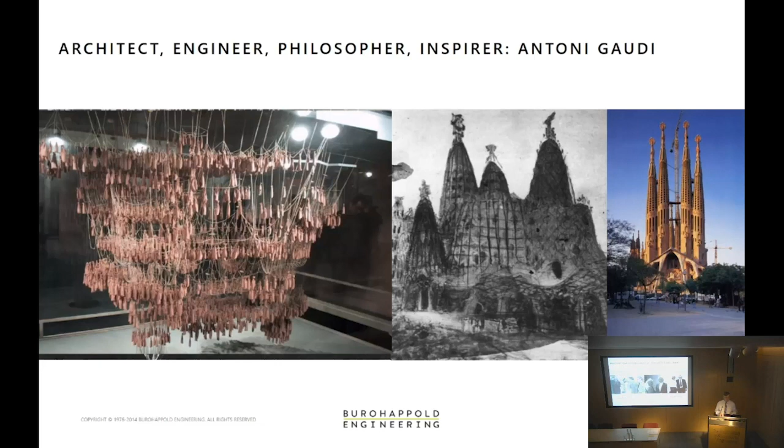I decided I didn't want that one there, but it stayed there. And so, Gaudi saw nature as a driver. He wanted to repeat the kind of forms that he saw out in the field, that he saw in nature, and he found ways through modelling of doing that kind of thing.

Buckminster Fuller, in a similar way—and I'm sure many of you know much more than I do—with his technical approach to architecture came a whole philosophy of how you should live your life and how we should marshal the materials of the world. A lot more than just an architect: an engineer, philosopher, inspirer, as I was calling it.

I think the same very much applies to Frei. I love the fact that we engineers tended to think Frei was an architect who needed engineers to help him, while architects tended to think he was an engineer, and that they were the architects working with this technical advisor. He bridged that gap—is it technology, is it architecture? And of course, it's both.

It's creating a form, an inspired building out of forces, flow, minimum material, and so on—a sort of engineering-driven architecture. The philosophy many of you may know came out of a reaction against the heavy, anti-human architecture and attitude he'd seen through the war, which he grew up in, wanting to discover something fresh and new, inspired by nature, just like Gaudi and Buckminster Fuller, but on a different scale.

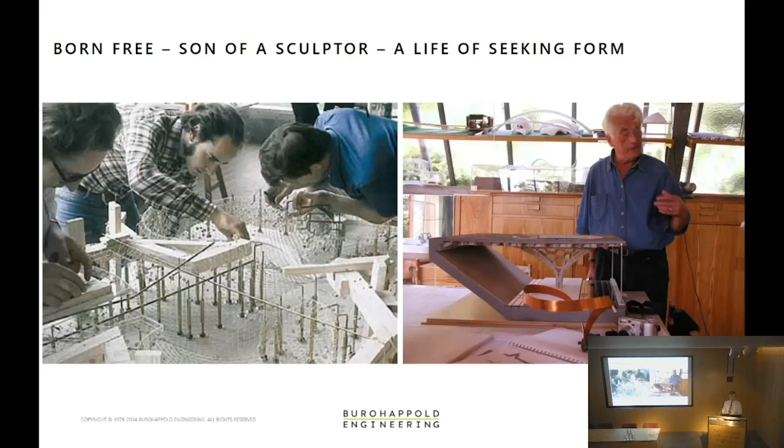He was the son of a sculptor, so there was that sense of form and shape and asking the question why. His first name, Frei, was I think rather clever—he had that sort of freedom and brought it to everything he did, his fresh approach.

This idea of looking at nature, at forms of nature—how do they use their materials, marshal their materials efficiently? How do they turn that into forms with the least material? And how do we translate those forms into buildings? How have we been doing these things over hundreds of years in the past, using local, available materials, and what forms come out of that? That approach, looking at nature, gave him an approach to architecture and engineering.

He was out there seeking inspiration shortly after the war. I had a little look back at the history of how things developed—it was really a philosophy about how to live as well as how to build, which he also expressed by building his own home.

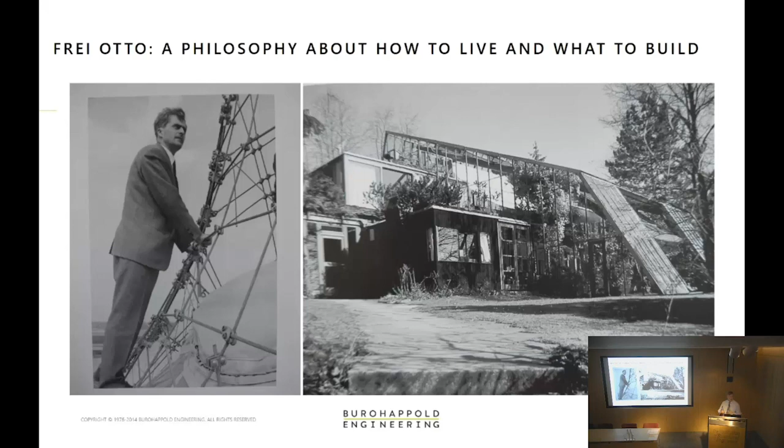In that home he created the spaces that now a lot of people seek—this kind of, is it outdoor, is it indoor space, at one with nature, at one with the cold in winter and the warm in summer, but still at the same time a natural buffer between the extremes of outdoors and indoors. So he lived what he spoke and taught.

In those very early days, in the 50s, he was learning from the masters around him about the use of tension and how that could be modeled—very simple models here of soap films, fascinated in a kind of Germanic way, I think, about how you link everything together, how you categorize. I think they must be fantastic museum curators, because they want to map the flow of everything, the flow of nature, and different forms and how they relate to each other.

So there was quite a streak in him—not quite academic, but a streak. It wasn't a random kind of creation; he very much wanted to understand a process, understanding what was at the core of his thinking. That helped a great deal when—I don't know the full history of this—he was funded by the government and was able to set up his Institute for Lightweight Structures back in '64.

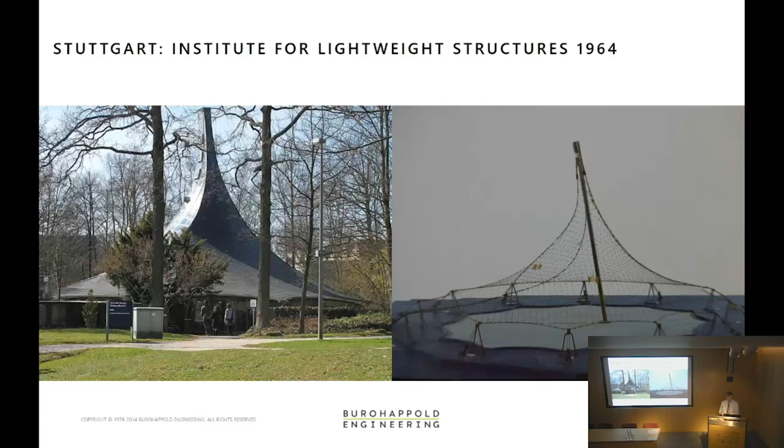It was actually my visit to that institute back in the mid-70s where I first met him—a very inspiring place, in the woods, which looks like something you've never seen before, and then you're told that it's a sample piece, a piece of the roof of the Montreal Expo pavilion.

Then I learnt that he was such a generous man. I was a student, being a bit of a nuisance, saying, can you please introduce me to people I should meet around Europe and around Germany, etc.

It was quite complicated. It needed a lot of thought. It wasn't something you could just get Mr. Model Maker, Mrs. Model Maker to go off and do and bring back in a week's time. It was crafted by experts, engineers, people who were inventing methods - is it better if we put the spring in this way or that way? How stiff does the spring need to be? Finding, through these forms, modeling methods which would equilibrate forces.

So they couldn't be done - they certainly couldn't be the sort of things we see too many of now, the 3D photocopying sand models, which don't tell you anything about materials. They don't have the force flow in them that's anything to do with reality. They just sit there like dumb objects.

This was very much active engineering meets architecture modeling. And out of this really hard graft and focus come the most amazing forms, but all driven by the flow of forces - how do I get a flow of tension from the masthead out to points in the ground. And then you discover the most beautiful forms that they make.

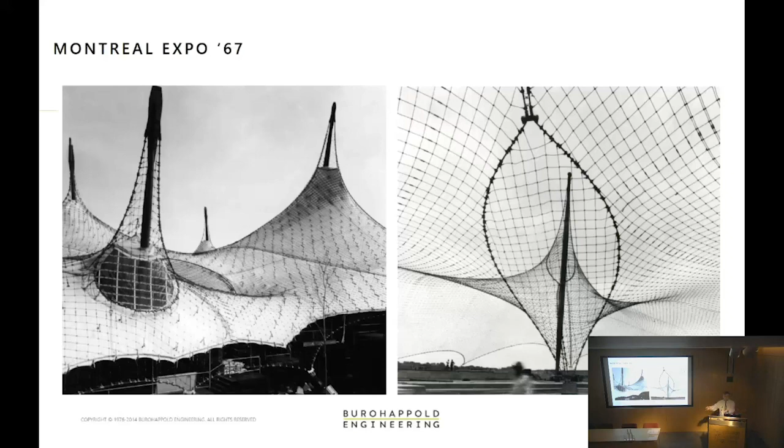So Montreal Expo was really one of the major starting points where people really started to notice Frei's thinking, but always collaborating with architects. He came as this engineer-architect who helped inspire and encourage architects - feet-on-the-ground architects who knew where to put the front door, whether it needed catering here or there, who could make a whole thing out of it. Working with Frei, their architecture suddenly took off.

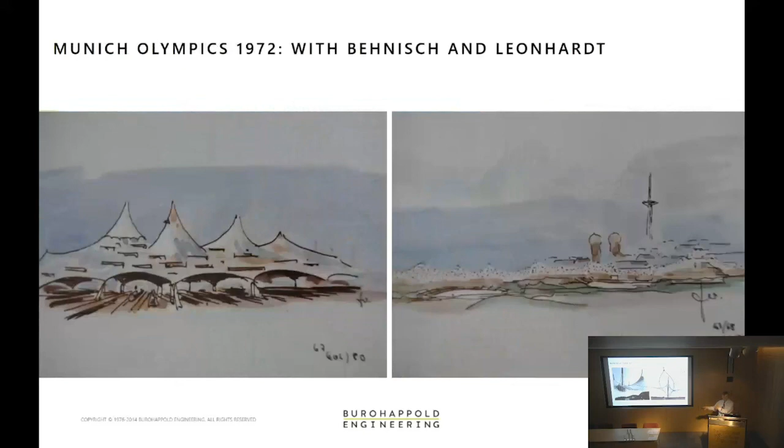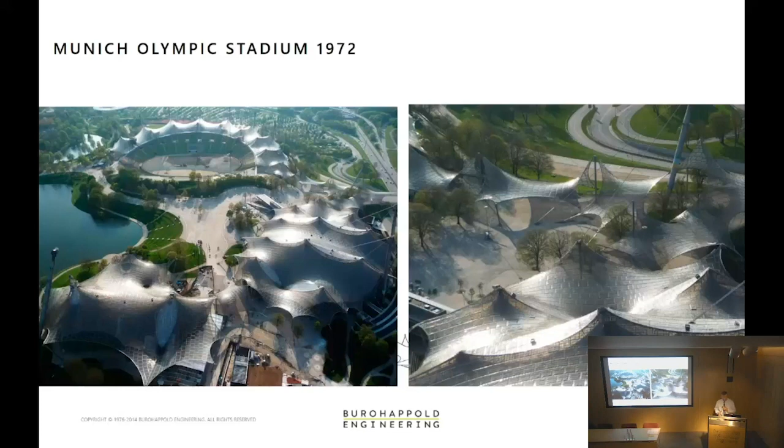Munich Olympics followed, with even more modelling, even more complicated and precise, particularly difficult when the local authorities required it to conform with big building regulations, not to deflect more than a few millimeters on a building that clearly wants to deflect a lot more. It's interesting whether they couldn't have defined this as a suspension bridge instead, and said don't think of it as a building. But the most beautiful, outstanding stuff came out really quite early in Frei's career, which I always think is quite remarkable.

From a personal point of view, I have to bring in the Ted Happold factor. He's an ex-president - I think he was a gold medalist over there too. So his spirit is here, etched in the woodwork as well.

And it was really meeting Ted that meant I got to meet Frei - he'd made friends with Frei, I don't know, 6 or 7 years before I met Ted, and had started doing some really interesting things.

Apparently the story is that he met Ted at an airport at Mecca - no, probably not, possibly at Riyadh airport. But anyway, they were both doing the same competition, for different sites if that makes sense. Frei was looking for an engineer, and Ted, working at Arup, was already an engineer on one of these buildings, a conference center. Frei was looking for an engineer for another one, this in Mecca.

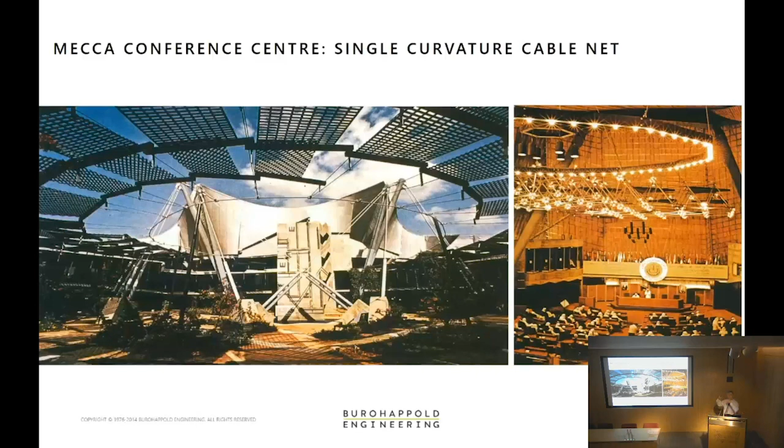Completely different kettle of fish - single span cable net, single curvature cable net, needed a lot of heavy concrete to weigh it down, and he was struggling to find an engineer who didn't just run away saying, well, we've never done anything like that, not interested, it can't comply with the DIN codes, thank you very much. But Ted had a habit of chuckling and saying, yeah sure, we'll do that. He had the whole strength of Arup behind him, and a fantastic team with Ian Liddell and Michael Dixon, so we'll crack that one.

And they did, they built it. Never got to see it, but of course, being in Mecca, they were not of the right persuasion, so they missed out. And out of that relationship, built in the very early 70s, other work started to flow.

This is where I first came in. They were working at Arup as a team, Structures 3, and had been asked by Frei to do another project, the Mannheim lattice shell, where I believe they already had engineers. They were working with local architects, and they kind of gave up. This was too thin. This crazy architect engineer who keeps saying no, it will work, and they had no way of finding out whether it would or not. So they went to Ted, can you help?

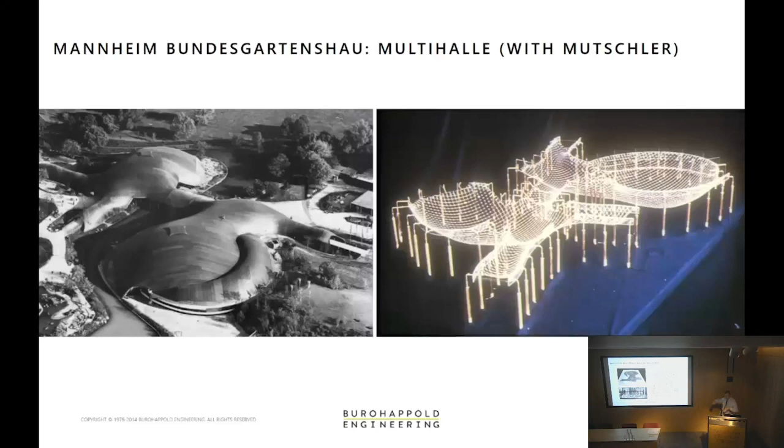And Ted, not knowing whether he could or not really, said yeah, sure, and set the team at Arup working away on it. It was a lot, as always, of modelling, but of course you're not seeing the tension structure modelling that we've seen for those tension structures. This is a shell, a compression structure, so it's much in the Gaudi spirit of things.

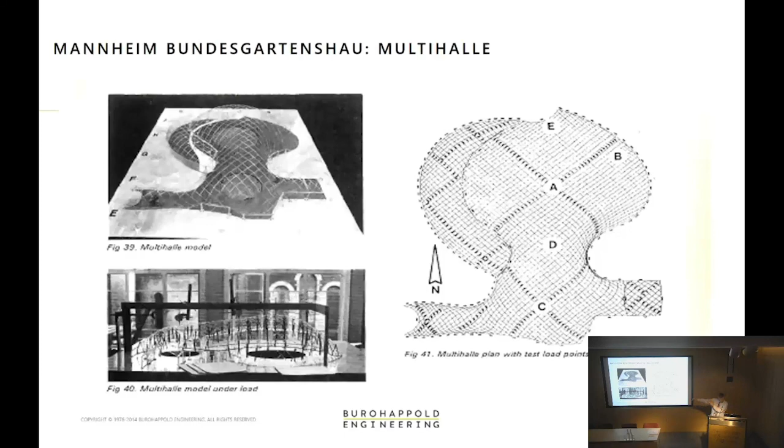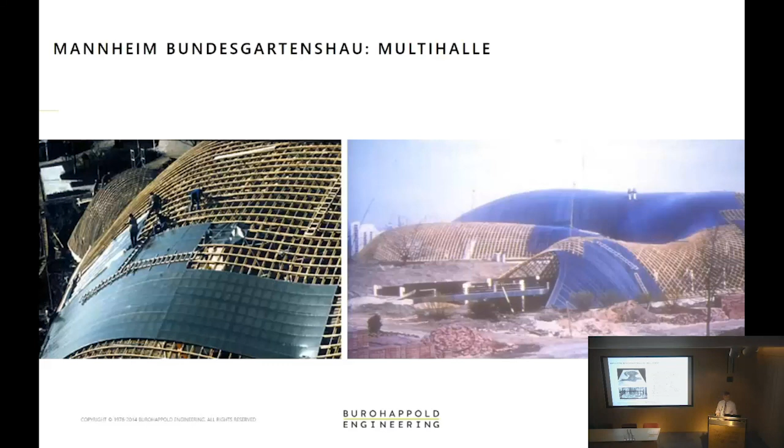And then hanging nails on it. Those near the front might just about perceive the nails, and testing it for buckling. No computer modeling really up to the job at that stage, so physical modeling to test whether this very thin timber lattice shell of a shape and a scale that nobody had ever done before would buckle or not.

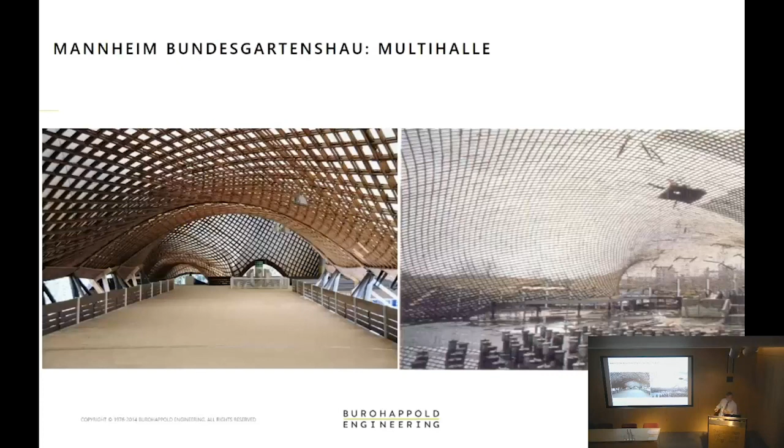And yeah, I managed to prove it would buckle, and out of which they decided, not surprisingly, I'm sure any engineer here wouldn't be surprised, but it's quite hard to see, that we did indeed have to include, as well as the two-way lattice, diagonal cables, almost invisible, because we couldn't tighten those nuts hard enough with our spring washers to stop the rotation of the nodes, to triangulate the lattice into a shell.

But that relationship now built up between Happold and Frei is really what I can talk about and show you just a few slides of what that meant for me.

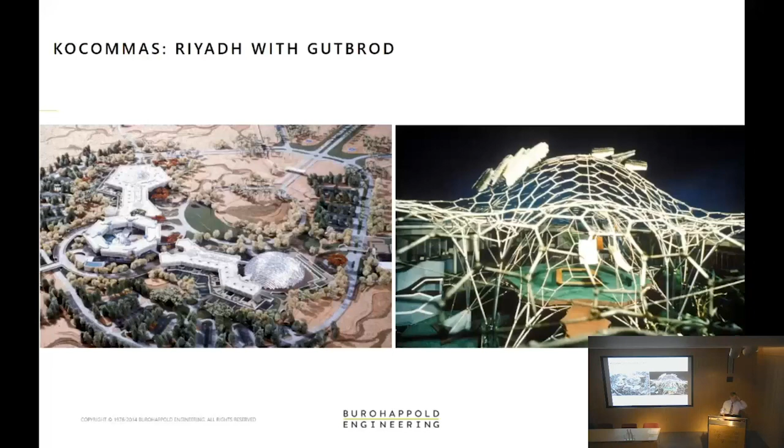Ted went off, while at Arup they were working on this much bigger project which Rolf Gutbrod, the architect, had won for a gigantic parliamentary building, King's offices in Riyadh. Didn't get built, probably no surprise for the political students in the room, and upside-down hanging models creating those most amazing forms of potential shell structures.

And my job was there again, Perspex models, hanging nails, listening to the radio and having a great time, back in the summer of '76, as it happens.

So that relationship, I think, was really important. I think at that point, that relationship between Ted Happold and Frei was probably the strongest engineering support which he really needed to carry through some of his dreams.

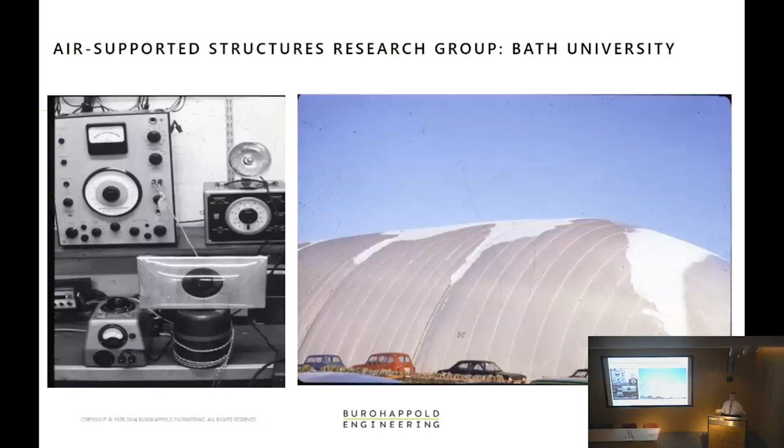And I thought what was interesting is, I hadn't realized at the time, but Ted immediately wanted to do what Frei had done, set up an institute for lightweight structures up at Bath University. And I didn't realize that that's what he'd drawn me into, so he said, come and join me up there.

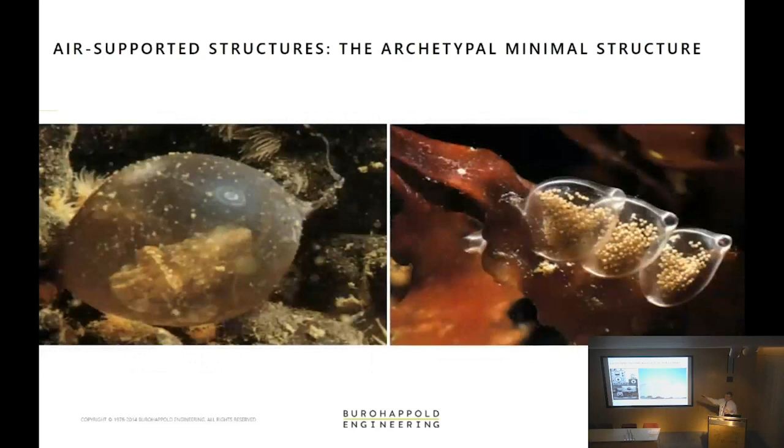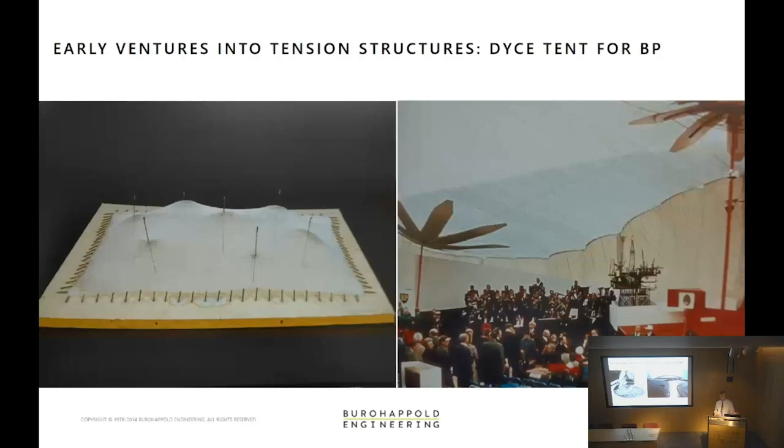And we played around with air-supported structures, research on air-supported structures. That ought to be a good way of getting to the fundamentals of what makes a tension structure tick. And of course, air-supported structures do have a very exciting potential. They have a very exciting origin.

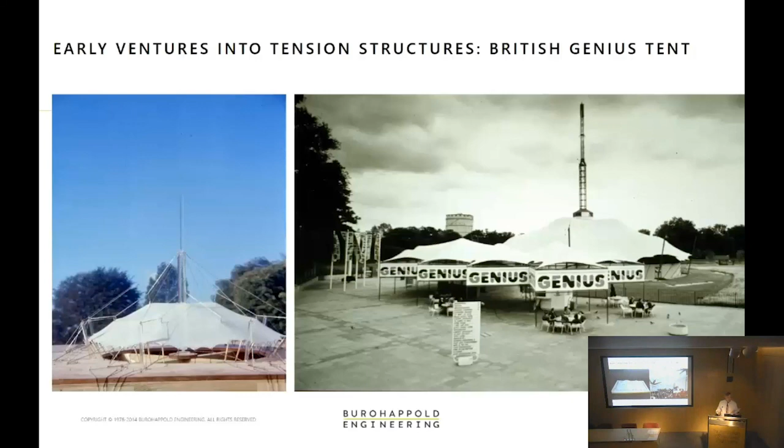And they can make some pretty little buildings. They can make some pretty little tents like Pink Floyd. And in those very, very early days, we were just playing with stocking models and pushing and pulling and making shapes, cutting patterns. Even here in these days, towards the late 70s, generally speaking, cutting patterns coming by measuring the model.

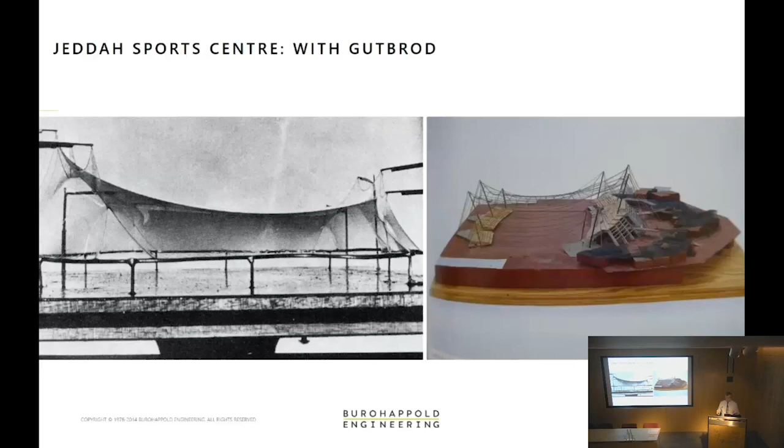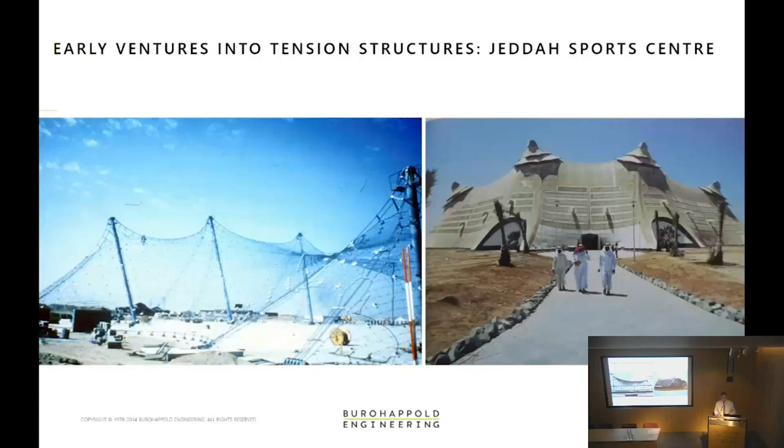And so you see a lot of this stuff starting to evolve. This relationship, I think, helped Frei, with that engineering support, deliver quite quietly. Often I don't think he's recognized for some of these very elegant, very productive buildings. They did their job.

As you can see here, the Jeddah Sports Centre. Nobody had ever seen anything like that. I'm not sure if they wanted to ever again, but it was certainly going to wake people up. It's very, very elegant without its clothes on, of course. It's sometimes a problem when you have to keep the weather out.

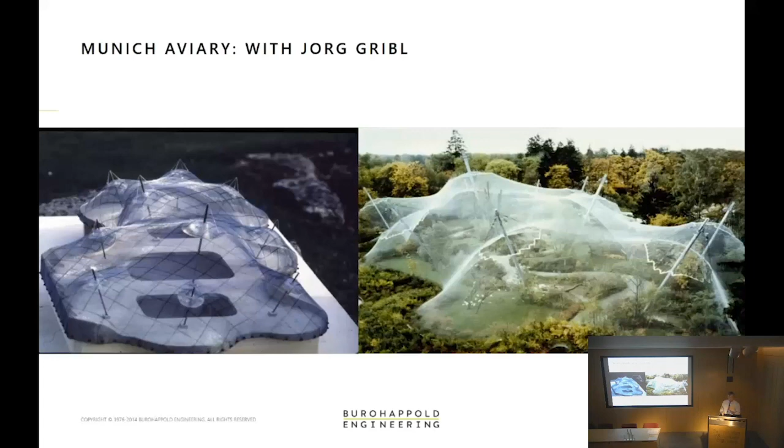And so these relationships, always trying to put up there the kind of core architect who then brings in Frei and says, I want to do something really exciting, help me. Let's use your way of looking at the world to help this be exciting. So the aviary in Munich, which spread into other aviaries. And again, further model studies.

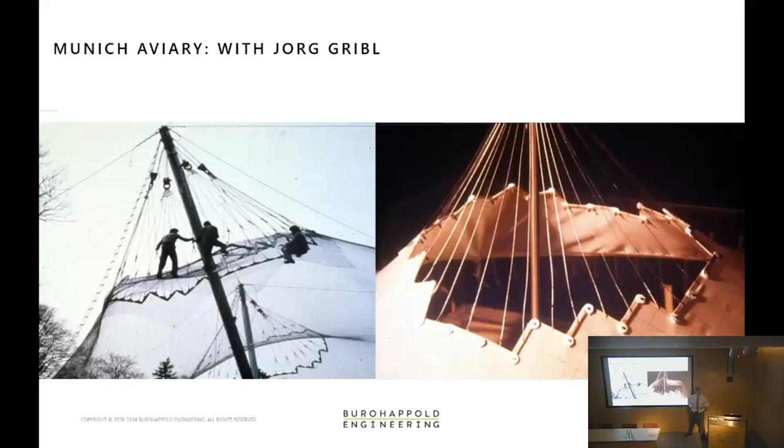So my luck was my coming to those moments with Frei were often around modeling like this. How the heck do you get the forces out of a two-way mesh of woven wire up to a point without the wire going, mangling and distorting all over the place? How do you keep it in balance and translate these forces into the radial forces successfully and let it modulate and move under loads.

And I remember the debate about whether it would need to be designed for snow loads, and there was quite a strong vote for no, because it would all go straight through the mesh. But someone cleverer worked out that if it was a very cold mesh and so on, it would sort of stick and build ice, and then it could build up. And almost, it's usually the first winter—I don't know, many of the engineers in the room will know this—it's almost as soon as you build it, it gets the 1 in 100-year load or something, so it's never worth skimping on it. And so we played around with all sorts of things.

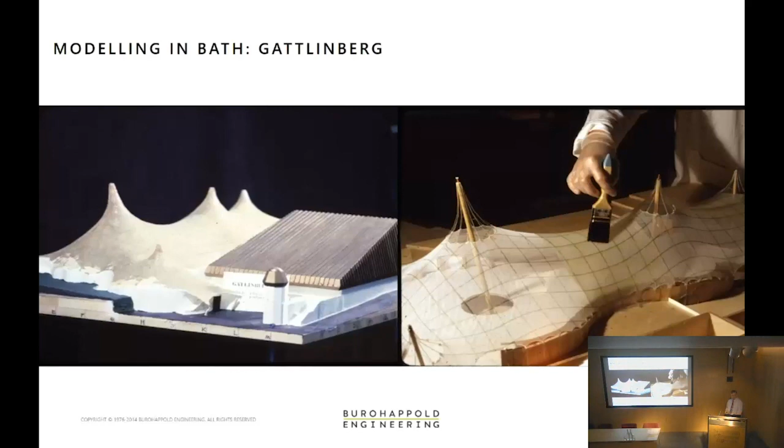And I suppose here the influence going worldwide, this was a project in, I'm going to get this wrong, in the States, but I think it might have been a Canadian architect. But people were coming from all around the world to look to Frei for help, and then Frei coming to Ted Happold to get that help. And even with Canadian architects looking at something he'd looked at with Arup previously, covering a giant community in the Arctic—in this case, not quite the Arctic, but 58 degrees north in Alberta, a pretty harsh climate.

And this idea, I found really interesting, and I think is significant about Frei, when you look at his ability to build in these harsh climates—this idea of the building as a skin, and the skin as a climate moderator, started to give a different sense to architecture. It's almost like not architecture for its own sake, it's architecture for what it can do for the people—the creating of the oasis garden, the creating of these sheltered spaces away from the sun, and yet somehow not imposing themselves heavily on you.

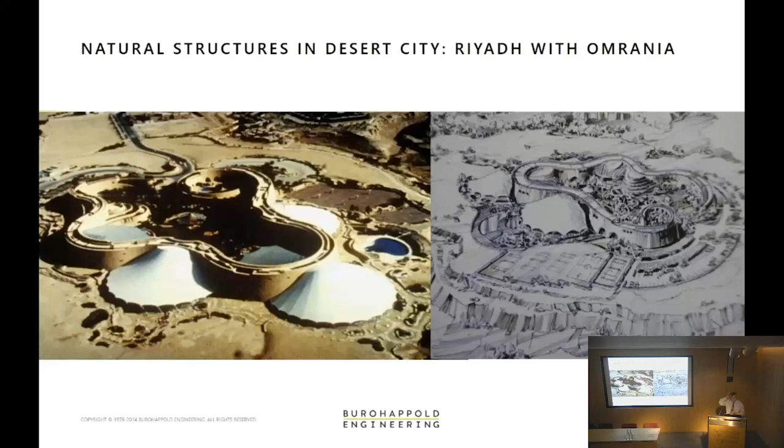Although having said that, of course, perfectly happy to create a quite robust core to all of this. And I think that combination he achieved, obviously with others, with OMRANIA, the architects in this case, is one of his masterpieces, and should be seen alongside something like the Munich Olympic Stadium, and I'm sure David would agree, having worked on it. And very, very beautiful space that he was creating.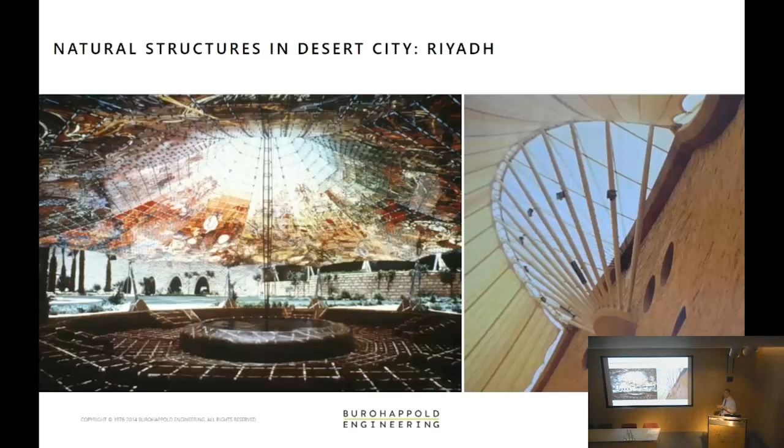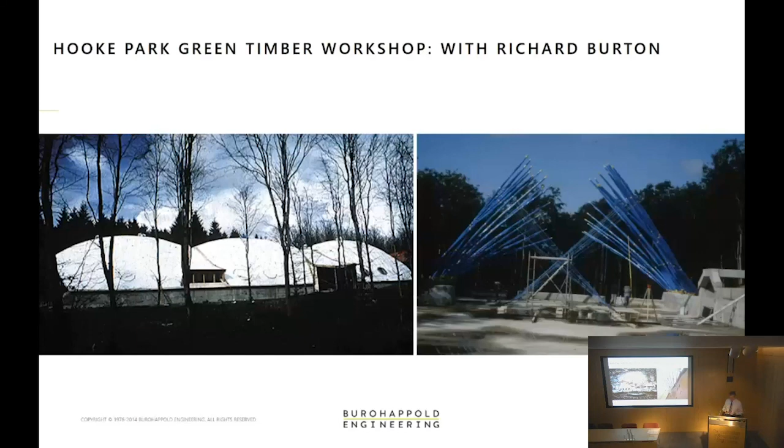I think this sense that he wasn't just about the buildings and the technology of the buildings—I think these start to show that there was always that element he was absolutely driving for: the effect that these shelters, these spaces, would have on people, the inspirational effect on people. And in the Medina Mosque, I don't have a video here, but the opening and closing of these umbrella roofs is quite an emotional thing to see happen.

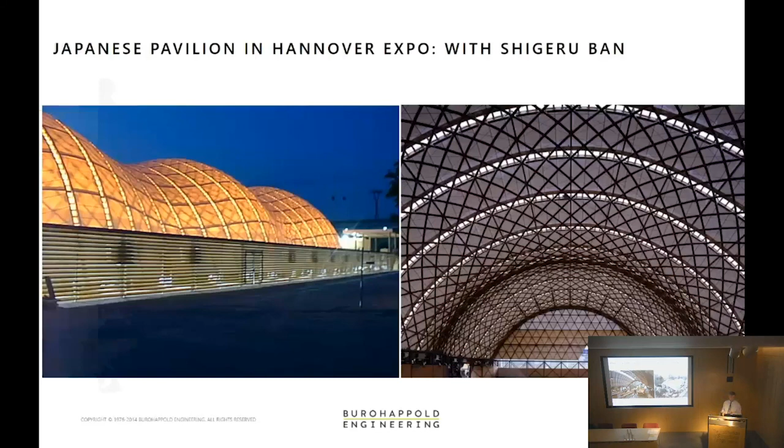And then the use of green timber over in the UK, finally seeing more of Frei in the UK, working with ABK, Richard Burton in particular, with Ted Cullinan at the Weald and Downland Museum. And to some degree, this was us helping make a marriage between Frei Otto and UK architects, Shigeru Ban.

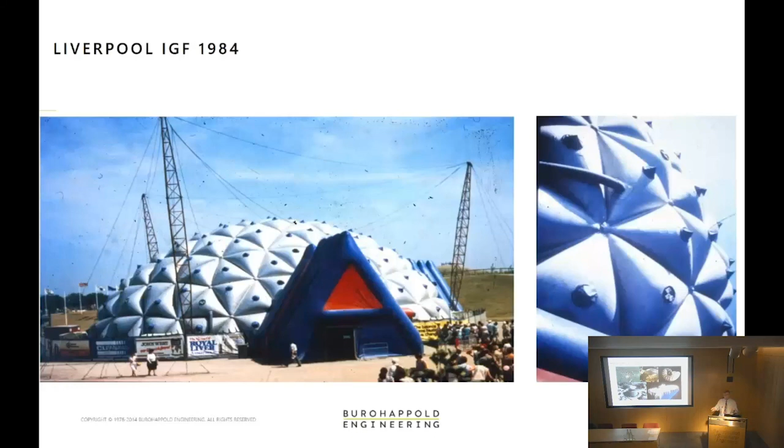That brings me to the journey I was seeing, observing this as a relatively young kid, a teenager making models and testing things. What did it do for me? You have to do it and then look back, and you realize so much of what I've done as an engineer has got this voice of Frei in the background, even though I was too modest and shy to ring him up. I was working with other architects who didn't particularly want to get involved with other people like that.

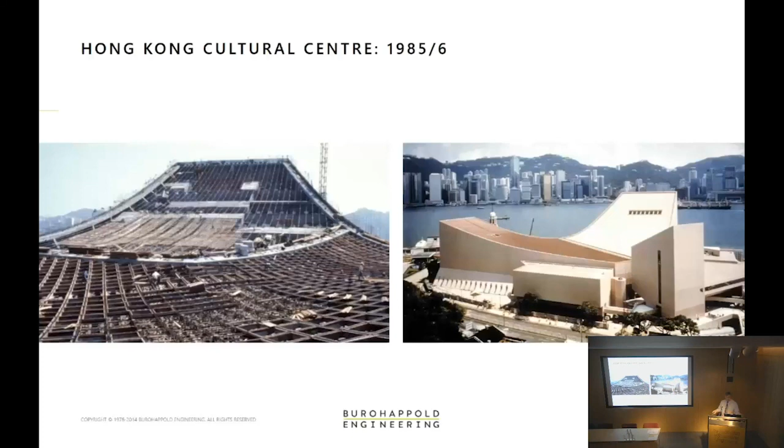So, crazy things like this very hippie-inspired object with inflated bubbles, shameless. Cable nets - I got the chance of doing a cable net structure in Hong Kong, very much inspired by that confidence we'd built up with cable nets, the ability to analyze them and use them.

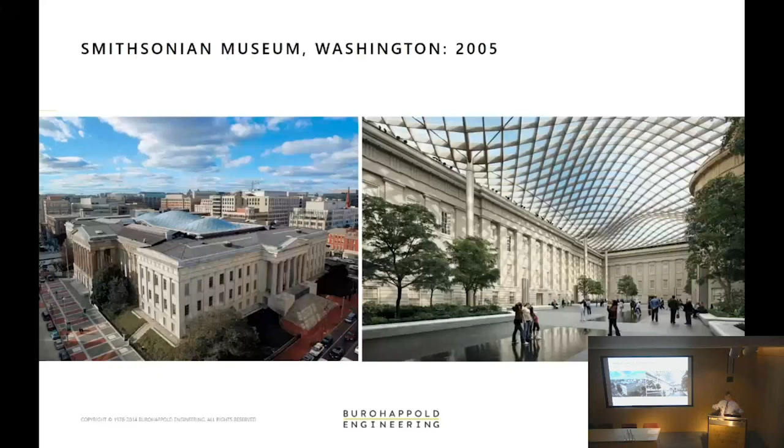After the British Museum, working in the States, a similar kind of problem, but different, wanting much stronger, better acoustic performance. So using depth of structure, not going for a three-way grid but a two-way grid, using depth of structure to put sound-absorbing material in, so the quality of acoustics in that space is beautiful. You listen to a choir in that space, and it's perfect. So a different set of criteria, we were able to do different things.

Norman saw, when he was working on the renovation of Dresden railway station, what if it was a membrane? You know, this is Germany, this is the land of membrane structures. Let's throw away our ideas of the heavy solution and explore light. And so it was then our job as engineers to say, how can we do this? What are the pros, what are the cons?

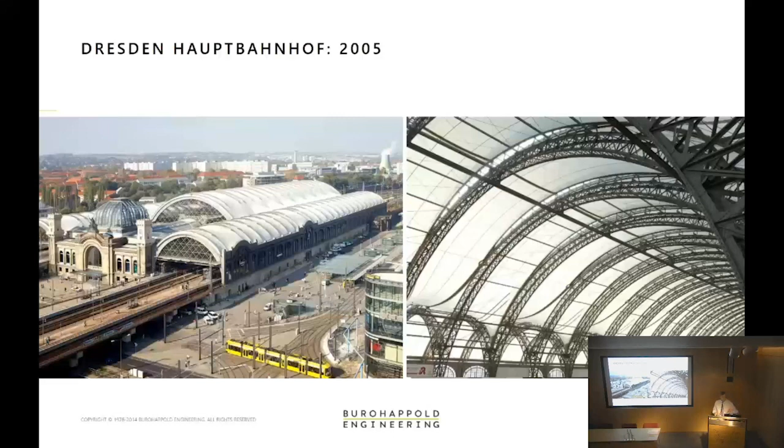But the lightness, by taking all the heavy weight of the roof off, meant that we could save all the old steel, which was rotting away over the last 100 years, and probably would have had to be put in the bin. Certainly what they'd done in Leipzig station a year or two earlier. We managed to save, I like to think, in real sustainability terms, the steel by going for such a light fabric.

So just finally then, I was trying to bring out this idea that there's always this sense of the human experience in these buildings, and that's what Frei was looking for and very sensitive to. And I personally, I do think that - and I know in our practice, I'm absolutely convinced, and in many, many others - that human-centered design and that awareness of the impact we're having on the individual, and the ability to start to understand it and predict it better, is something that engineers are looking to do alongside architects.

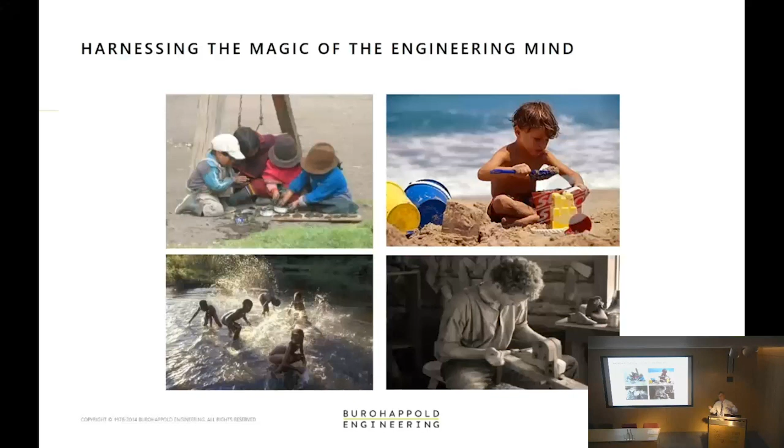And in the practice, we like to say, bringing this back to engineering, this isn't all about architecture. Just as it was with Frei - is it engineering, is it architecture? It's neither really, but it's this harnessing of what we call the engineering mind, because it's about evidence, about understanding form, about understanding how we can predict the impact that form will have - not just on how the wind's going to blow, how it's going to be stable, but ultimately how it will affect people emotionally when they're in there, and how we can tune it. So this harnessing of our magic, I think, is what Frei has helped us do.

So it really always brings it back, I think, to this amazing, quite quietly spoken, great fan of ballroom dancing man - you didn't know that one, maybe. He was pretty good. So I thought, thank you to Frei. He'd love to be here if he could be.

But I think there's just plenty for us to do. Get busy, we've only just begun. He showed us the way. And now I hope the film will show us the way even more. Thank you.